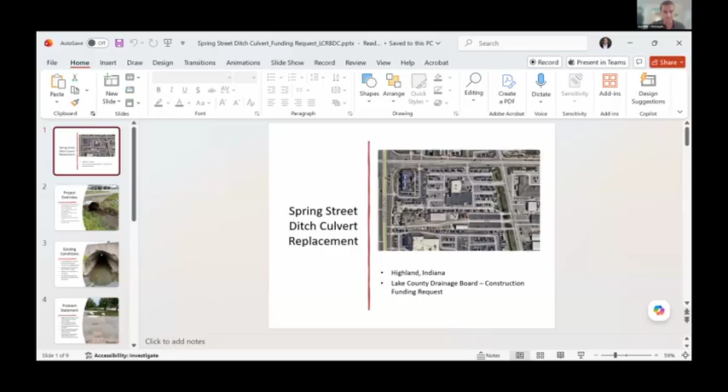I'll get going. So first off, thank you to the commission for having me tonight to present. My name is Joe Wilk. I work at Christopher Burke Engineering, and I'm here on behalf of the Lake County Surveyor's Office and Lake County Drainage Board for construction funding requests for the Spring Street Ditch culvert replacement.

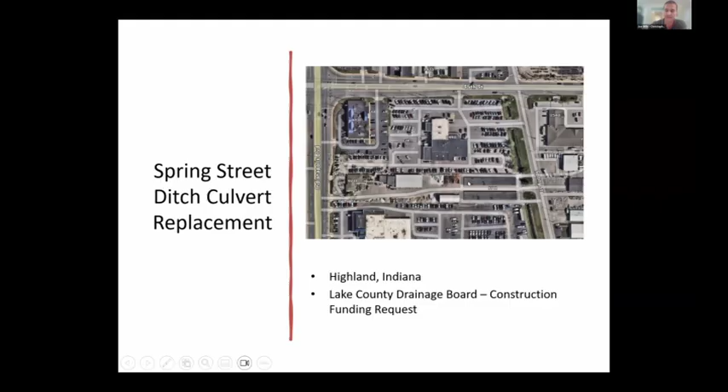You can see on my map here that this is located just southeast of Indianapolis Boulevard, near 45th Street. Spring Street Ditch runs south to north through here in Highland. So project overview: replacement of a failing culvert on the Spring Street Ditch. Local sponsor, as I said, is the Lake County Drainage Board. It's within the Cady Marsh Ditch watershed, and Spring Street Ditch feeds into that.

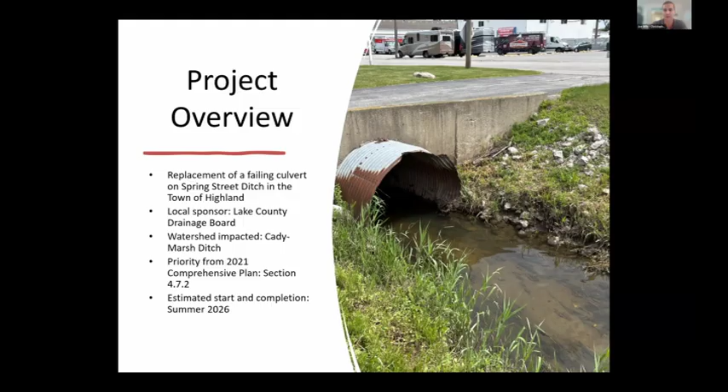From the 2021 comprehensive plan for the commission, failing culverts along Spring Street Ditch were noted to be a priority, and this is one of them. Estimated start and completion for construction, we're hoping to do sometime later this summer. This is a photo of the culvert on the upstream end along Spring Street.

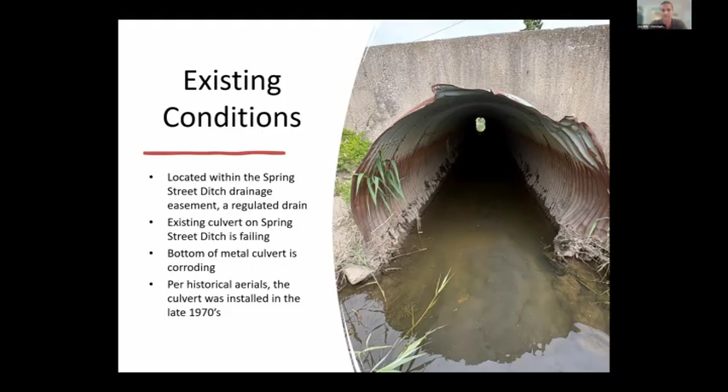Some more existing conditions: it's a regulated drain right from the Lake County Surveyor's Office. As you can see in this photo, this is me standing in the middle of the channel. The bottom is corroding out, we have some flow lines getting up about halfway, and it's seen better days. I was looking at aerials the other day, and it looks to have been installed likely in the late 1970s, so we're approaching 50 years, which is about the typical lifespan of a culvert.

So some of the problems: it's failing, restricting flow and conveyance during storm events. Any type of failure in a culvert could increase flood risks to surrounding businesses and local roadways in this area. And as we all know, each year there seems to be greater runoff from urban areas and rising rainfall rates, so we want to make sure we get this culvert properly restored in the near future.

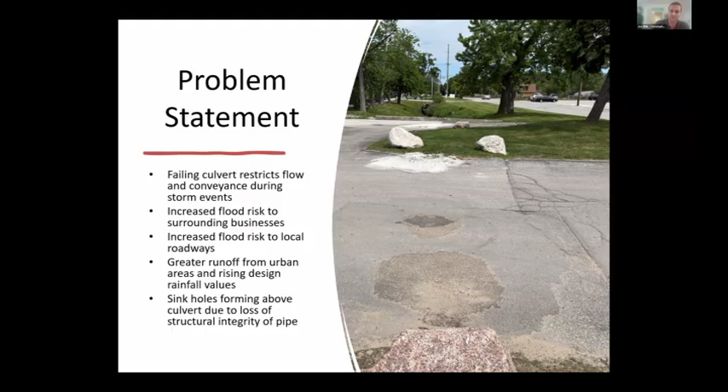This is a photo from the top. There are 3 driveways that go overhead, and sinkholes are forming due to the loss of structural integrity of the pipe. I actually walked through this pipe, and there are some parts where it's starting to collapse in.

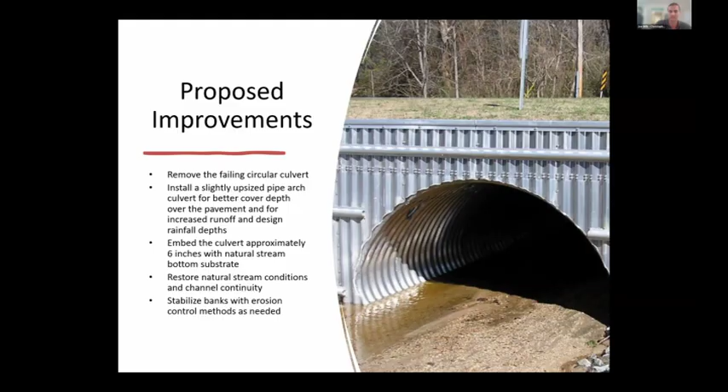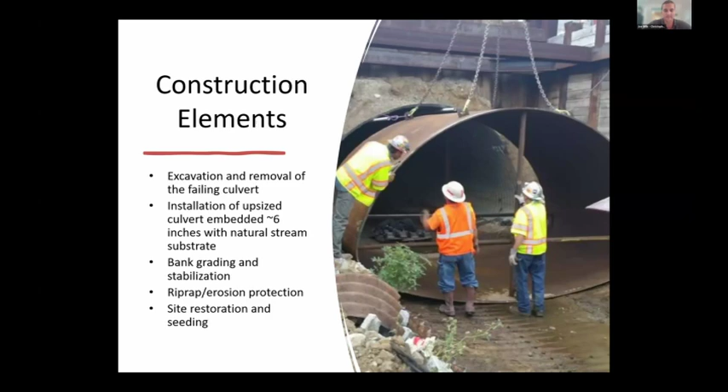So some elements, basically just removing that culvert, that 6-inch substrate, and then some site restoration for those driveways and the grassed areas on top for this property.

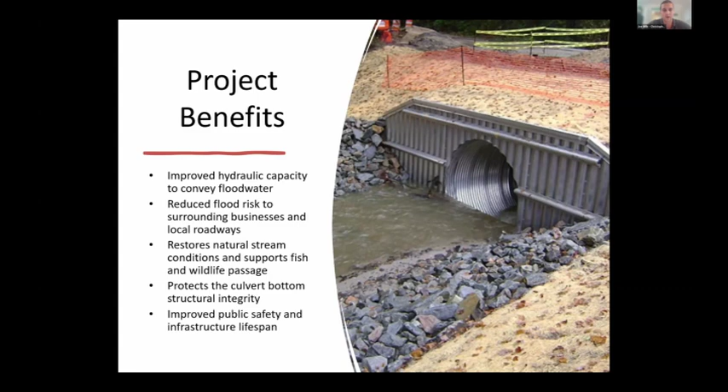Project benefits: we're getting slightly upsized culverts, which would be great for hydraulic capacity, convey floodwaters on a day such like today, and reduce that flood risk to surrounding areas. And that 6-inch natural bottom helps with fish and wildlife passage, but also protects the culvert bottom from corrosion like we've seen in a lot of other culverts in the one at hand. So hoping to get pretty good lifespan on this new culvert.

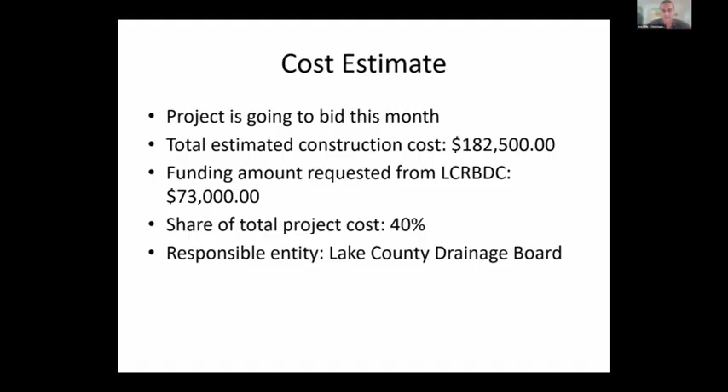Now the project has been approved to go to bid, seek bids. So we don't have the low bid yet, but the total estimated construction cost is roughly $182,500. Funding amount requested from LCRBDC is $73,000. Share of total project cost is 40%. So thank you, and I'll take questions.

I've got a few. Is this out to bid yet? No. But it's fully designed? Correct. Is there a reason you guys didn't go with the concrete box culvert? The price on that goes up quite exponentially. Okay. And we've seen a lot of these lower trafficked driveways such as this. These contacts the company that does a lot of these corrugated metal pipes. We've had quite success in the past on more lower trafficked roadways and driveways, because it's just a driveway.

Correct. And you had mentioned, is this a regulated drain? Correct, regulated drain for the Drainage Board, Lake County. And how much bigger is the capacity? You're increasing the size of the drain, so percentage wise? I'm not good at simple math here, but we're going from a 28 square foot opening to a 30 square foot opening. So nothing drastic, but definitely a benefit.

And there's restrictions upstream and downstream of here, so until all successive culverts each way were to be upsized. And when do you anticipate going out for bid? In the next week or two. Okay, that's all the questions I have.

Thank you. Next up, Town of Winfield, 117th Avenue Drainage Improvement, Mr. Repay. You want to come up here from DLD representing the town of Winfield?

As explained to me, they have several flooding issues here normally on this road, and they want to put together a more comprehensive plan. That'd be somewhat accurate. Yes, all right, quite accurate. I listened then. Okay, are we?

Yeah, if you want to share. Can you share? Sure. Here's what's gonna happen if I have to start, get on the Zoom. If I have to be the technical support, we're really in trouble. Right there. That share. So forgive me, I don't use this laptop, I have a desktop, so I figured. I'm being trained as I go on this one. But let me get this up to full screen.

All right, so as I said, this is 117th Avenue, and to go on down, this is where it's located. It's along the old railroad bed and on 117th Avenue in Winfield. And for quite a while, it's been some issues with drainage.

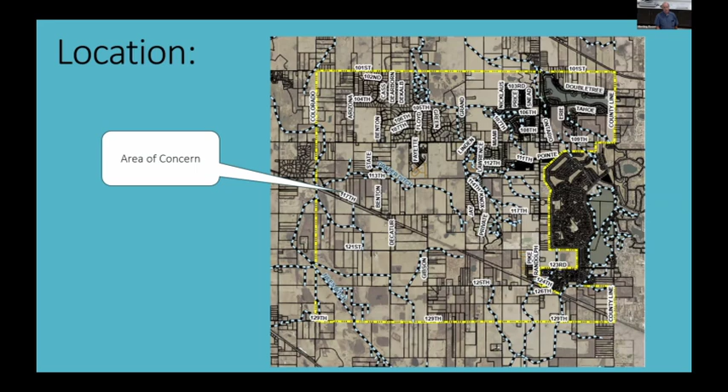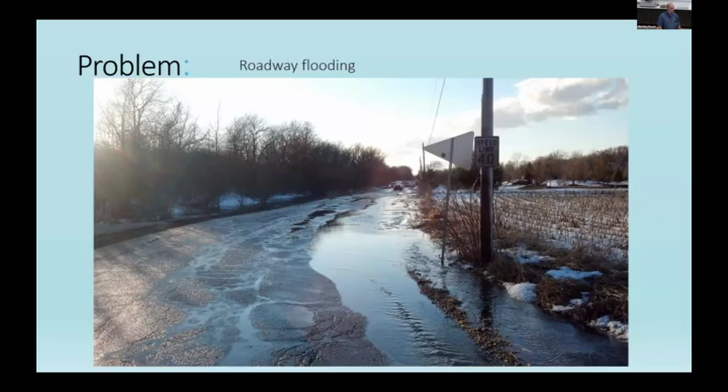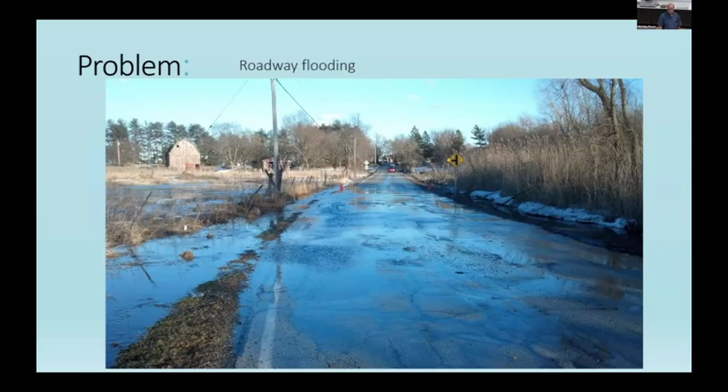You can see here, as the roadway gets overwhelmed with water, and as well, of course, this was wintertime too, but you see there's very little ditches or anything on the side, and it's aging the pavement faster, and it's also being a hazard for driving. Continue on, this is the low section, and I'll get to where it's located on the thing, but you can see it's just overwhelming it.

We're going to look at this picture again, but keep it in mind - you see the railroad on the left-hand side of the picture, and you see where the ditch is.

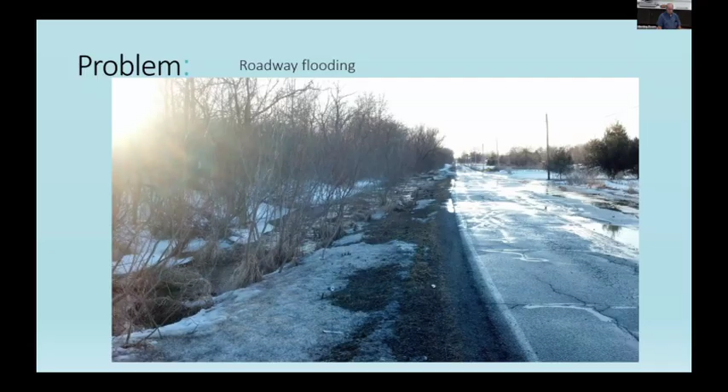The town did an investigation on the watershed, and it's served by a single culvert under the railroad. Of course, railroad culverts are notoriously small - I don't think they're meant to do much conveyance.

The elevation on the roadway side, the north side, is about 683 feet. The distance to that low point, which I'll show on a map shortly, is about 1,500 feet.

Originally the town looked at the simple way to take care of this - just do a roadside ditch. It didn't work out so good, because if you put a slope in at 1%, we'd need 15 feet of elevation change. Going down to the other side of that low point, it's only 691 feet. Doing the math, we don't get our 15 feet - we get about 9, from 683 to 691.

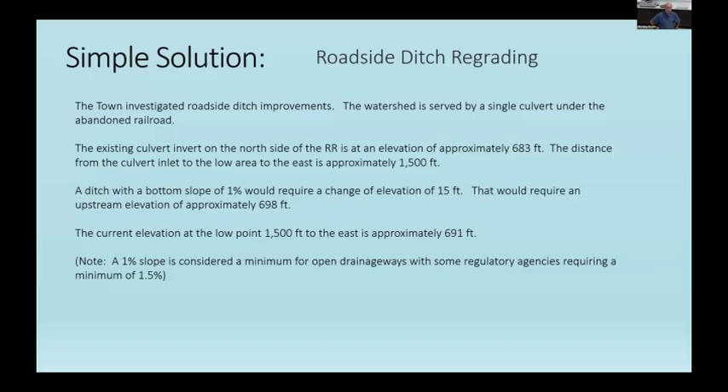So we continued looking at this. Here's the location - the low point is about 1,500 feet down, and you see the culvert outfall on the side at 674. That could be good news, or at least we were hoping. But as all stories go, this one didn't end up so nicely.

We realized you can't do a ditch at that elevation on the inlet side of that culvert, so we began to look at the south side. But then you go back to the same thing - if you go down there, we can't get that elevation all the way down to 1,500 feet.

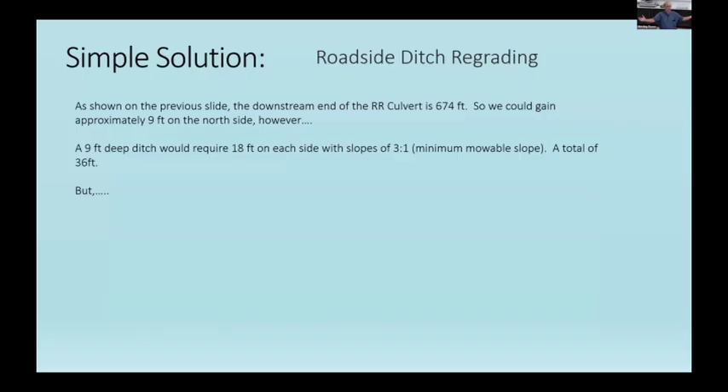But now the ditch is about 9 feet deep next to the road, and going through it with 3-to-1 slopes, we would have needed about 36 feet of open space to put a ditch in at some points.

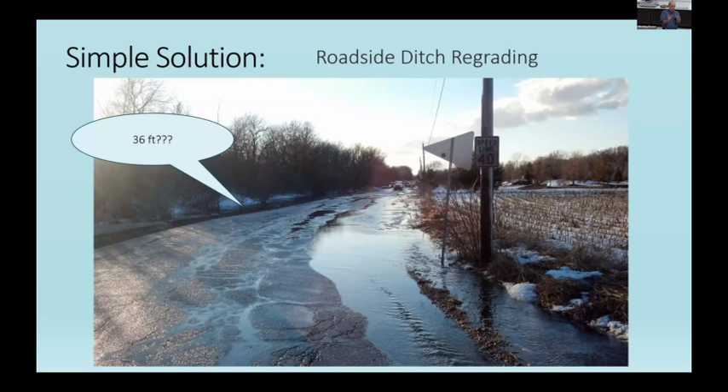So we go through, and that's the picture you saw earlier - there really isn't a lot of space between the roadway and that railroad bed. And as all stories go, there's an 8-inch gas line we found between the road and the railroad bed, which is huge as far as gas lines go.

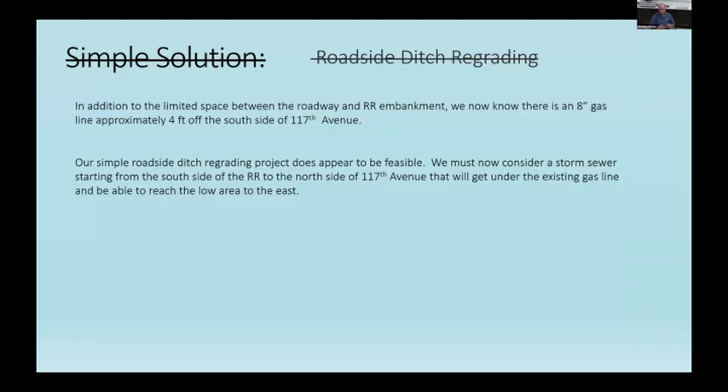Now we've got to keep cover on it - it's 4 feet deep. There's just no way we can put a ditch over there that's going to serve this area. That's what led us to the next thing, also looking at the watershed - there's almost 100 acres coming down to this.

So what we want to do is restudy this and try to get a culvert under the railroad, get it down low enough, but we're going to have to create a storm sewer to do it. That's what the request is really about.

We're going to do the storm sewer and preliminary design on that, so we know what we're dealing with. With that storm sewer, we've got to check that watershed, make sure the pipes are sized right, and then look at detention because we're going to be conveying water a whole lot quicker down there.

The only place to do that will be on the south side of the railroad bed, which is prime farm ground right now. So we need the plans and sizing of the ditch to begin approaching the landowners and say, hey, we need to do detention - what can you let us do?

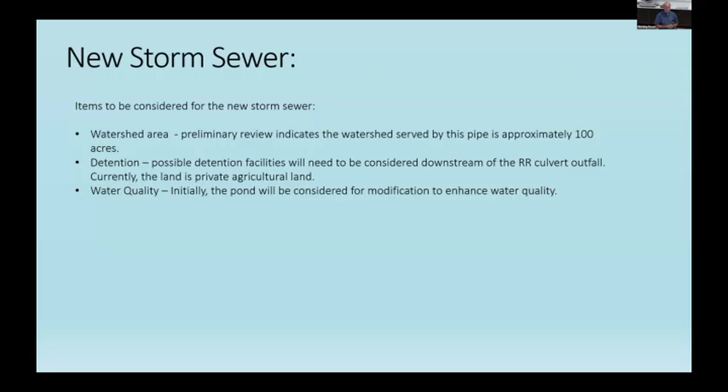And of course, we want to address a little bit of water quality by modifying that pond. So that's it in a quick nutshell of what happened and what it took to get there. We'd just like to request assistance for the study and preliminary plans.

We anticipated a cost of $58,500 and are asking for 80% of that, $46,800, from the commission. Did I cover enough? Any questions? This is strictly for engineering and design.

Is there an ancillary thing that we're doing? Is there development going on? Is that why you're asking for this, or future development?

On 117th, Crown Point just put a school down the road, and this 117th is getting to be a very busy road all year round. So you saw the flooding - that's going to be an issue with the buses and everyone else going, as well as the rest of the town. It's becoming more of an artery for the town than it used to be. So we're trying to get it addressed, and that's really all we're going to stop with at the roadway.

But we do have to go to the north side of the road with the storm sewer because of that gas line. And a question, go ahead Tom, Robert.

Is this a tributary to what ditch it flows into? Is that Beaver Dam ditch? I would think so. It's that or Niles ditch, one of the two. Not too many others that go that way. We did a study, I think Dan, 3 or 4 years ago on Beaver Dam, and there's capacity for that ditch with all the development further west.

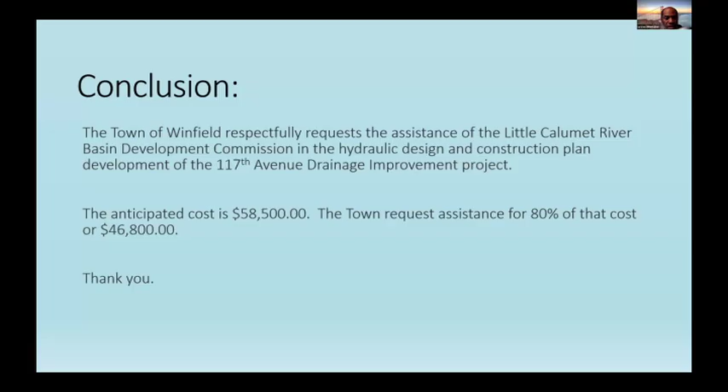Is the one existing drain regulated, the one we're going to outfall to? No, not. Again, this one drains down into another drain that is a trib, but it's still not a regulated drain. The next drain is a regulated drain through there.

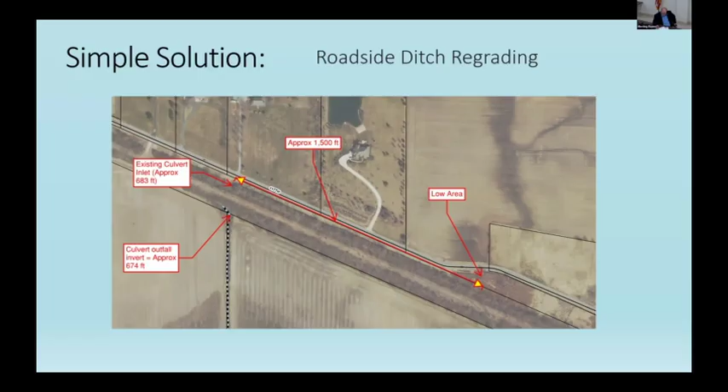So the third item on the list was going to be the Maryville Stormwater Utility, but they're going to delay that till next month, a future date. They are dealing with a lot of stuff going on right now, which we can understand.

After that, we've got the City of Hobart, Lake County, Wisconsin Street Bridge Causeway. Yeah, good Dan, you hit it. It's part of our Deep River study.

Glenn's here. I don't know if Dwayne, are you on this one or not? Yeah, Dwayne's on this one, Dwayne Elvison from Lake County Highway. Are you gonna present from there? I will call it there. All right, so they're gonna present on the bridge, and I think there's been some small changes to their design, and they'll explain that to you as to the hydrology of Lake George and Hobart.

Do I need to be your IT support too? I think I'm... Jodi's laughing at it.

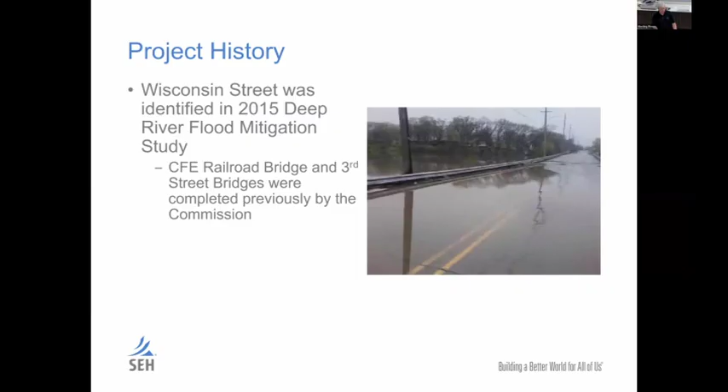This is Wisconsin Street back in the 2008 flood, which was the overtopping event here. As part of that study, we had an existing 110-foot span of Wisconsin Street. There's been structural deficiencies on this project, I think, since we started it in about 2018 on the design side of things. Currently it's load rated for 12 tons to go across here.

We're at the point now where we can't wait any longer on this bridge, and we need to start moving forward on this in order to have this safe bridge through here.

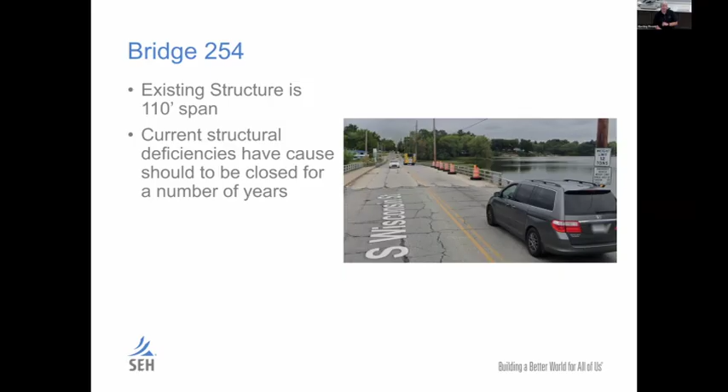So proposed on this project, we do have a 140-foot span that was proposed on this project. This does have a low member elevation that exceeds the 100-year elevation out there. What this does, and I do have a table in just a second here, is a summary of all the kind of design flow elevations through here.

Where we're at on this project is out to bid. We have extended our bid deadline on this project because as we got into the Hobart Dam analysis that you guys saw last month, there were some changes here.

We had proposed to raise the road, the causeway, up about 3.5 feet from the low point. As we continued the Hobart Dam analysis, and got some initial feedback from contractors, it was an extremely costly effort, extremely difficult and extremely long time frame. So we pulled back the initial bid date so we could issue an addendum to just reconstruct the roadway at its existing elevation, or resurface it at its existing elevation, and build the dam, and reconstruct the bridge with the expanded opening there.

So the Hobart Dam project, just to give you a quick summary here. The top line here is the corrected effective elevation, this is the 2014 model data that was done originally. At Wisconsin Street, the BFE was 612.60. With the railroad bridge at 3rd Street and Wisconsin, we're lowering that base flood elevation down to 609.49. We've talked through this with the dam as well.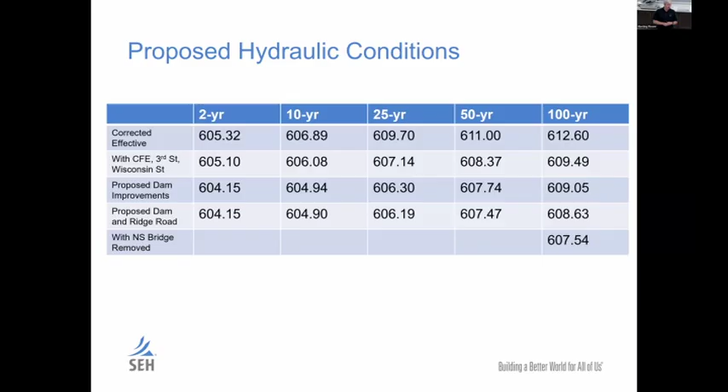Our original cost estimate on this project was 6.3 million. We've since revised the scope of work to remove that roadway elevation, and we're coming in right about 5 million. So the city and county are requesting 50% of the construction funds. I talked about that revised scope, but we are anticipating opening bids in mid-July for this project. That'll open up any questions you guys may have.

Unless Dwayne and Alex, anything on your guys' end would you like to add?

As far as the bridge goes, right now at Wisconsin Street Bridge over Lake George, that's the county's number one priority as far as bridge replacement. That's the worst bridge we have. It is in serious condition - it's posted for 12 tons. So it is in serious need of attention. Right now we've got that on a 12-month inspection frequency, so that bridge gets a lot of attention, a lot of inspection. We keep a close eye on it. So it does need to be addressed.

Just for some historical purposes, I was standing on that bridge in 2008 when that flood came through. So this has been a long process, but it's going to relieve a lot of flooding for a big segment of northeast Lake County. It's a very needed project. I'll also add that since 2008, with all the improvements to the bridges throughout town, we haven't seen that flooding on Wisconsin Street. So the improvements that have been occurring have been helping significantly. We thank everybody that's been in support of those projects.

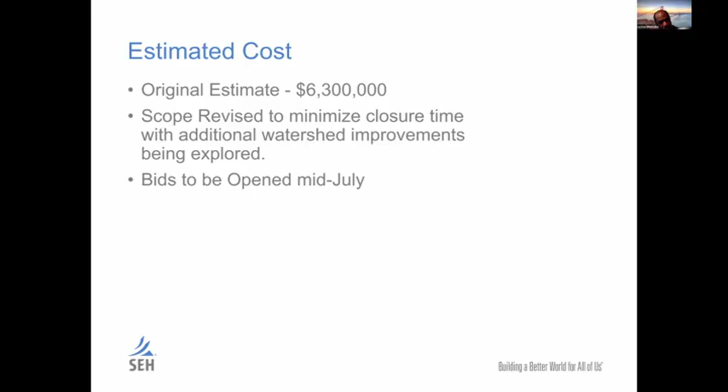So the 20 feet that you show, the 20 foot approach shown back on the drawing you had up - so that does not include anything? Where is that 20 feet? Okay, there it is, 20.5 on 20.5. Okay, so the opening here is going from 110 feet to 140 feet for the opening on Wisconsin Street, and it does not include the approach on either side. Correct.

But the 6.3 million includes all that.

Mr. Chair, yes, Mr. Ware. You mentioned - is it currently overtopped during high water events now? So the elevation, yes, the low point does overtop. The bridge itself does not overtop at the moment.

The roadway approaches overtop. They have not overtopped since the railroad bridge was replaced. So that was kind of the major discussion - we wanted to see all of the improvements and look at this more holistically before we build up the road just to build up the road. The comment also was that this is the number one county priority of all the bridges that the county oversees. Yes, it's rated number one as far as priority for replacement right now, out of the 186 bridges in inventory and maintained.

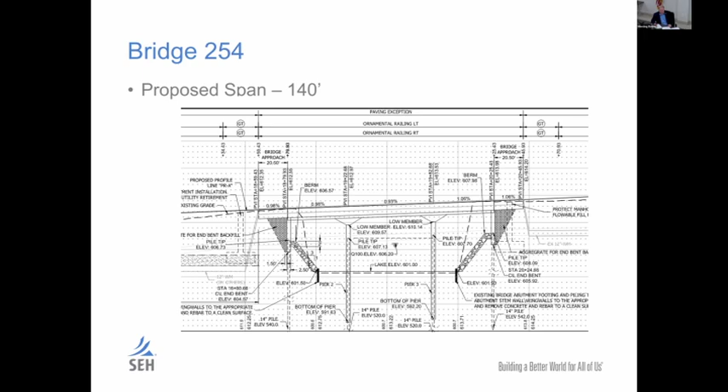So basically it's open next spring. Right, it's pretty exciting. Anyone else? Like I said previously, if we have additional questions, Dan may be forwarding them to you. Thank you very much.

Moving to the next order of business, other issues and new business. Mr. Chairman, I'd like to make a motion to approve resolution 2026-11, an interlocal agreement with Lake County for the shared cost of construction services for the replacement of Lake County Bridge number 45-00143, Kennedy Avenue over the Little Calumet River. We have a motion, we have a second.

Mr. Repay: So in previous meetings, I told you we had an agreement in principle. This just makes it more concrete in an agreement. They're gonna give us $450,000, thanks to Dwayne who wrote the interlocal agreement, a year, for 10 years. So they're helping us out a lot on Kennedy, and we thank the commissioners and Dwayne for helping out in the cause.

To sort of memorialize that, was it on the commissioner's agenda today or no? That's all right, we'll have to get someone I know to get it on the agenda, I guess, right? I know what the family discussion will be this weekend.

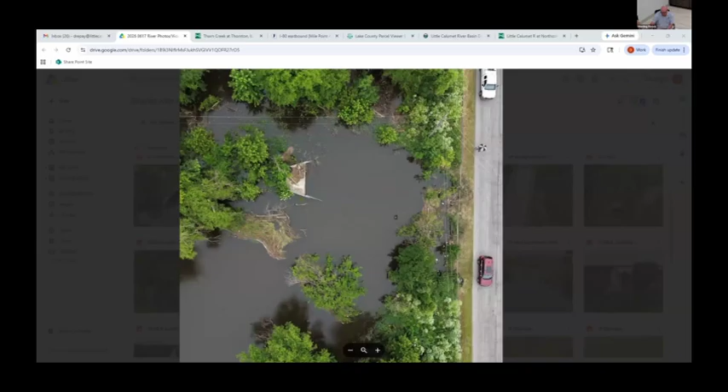If you can, let's see if I can zoom in and it'll catch up. But you see these two half circles are the actual culverts that are collapsing and encroaching on the actual road here. If these collapse or fully collapse, there is no way for the water to make it east to Burns Waterway.

So, pretty important - we sent this over to the city for their comments. They have had none yet, so we would just ask to go out to bid for this project.

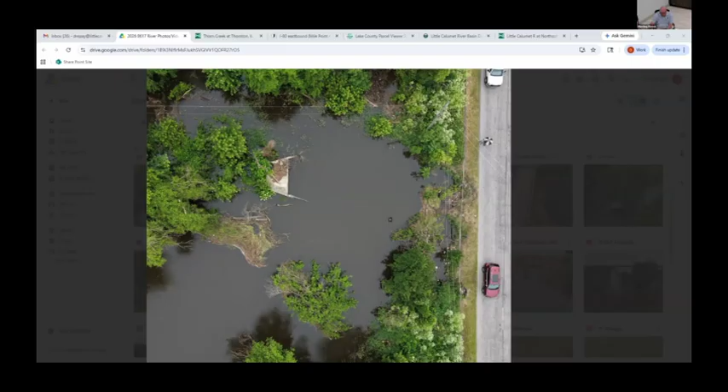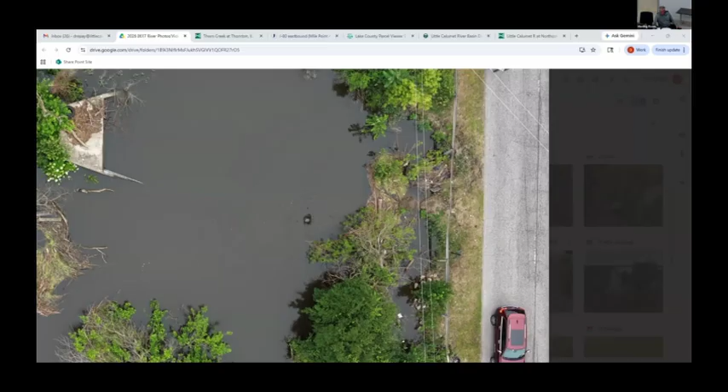This authorization to advertise bids for the Martin Luther King Drive culvert replacement. Lambert, Yes. Tom Shinsky, Yes. Dave Castellanos, Yes. Ron Ware, Yes. Jenny Orford, Yes. Robert Ochi, Yes. Katie Fesco, Yes. Levon Whitaker, Yes.

Next item up is 10C. Motion to approve an agreement with Delta 3 for Kaiser Ditch clearing from US Route 30 to 73rd Ave in Merrillville at the daily rate of $7,000. I have a motion. Do I have a second? Second. I have a second.

Mr. Repay: Once again, I've got on the screen the aerial from Lake County GIS system. This blue line is Kaiser Ditch, from US 30 all the way to 73rd. You see, it's very tight quarters between these houses. It's a priority for the town of Merrillville, which I was hoping they would be here as well.

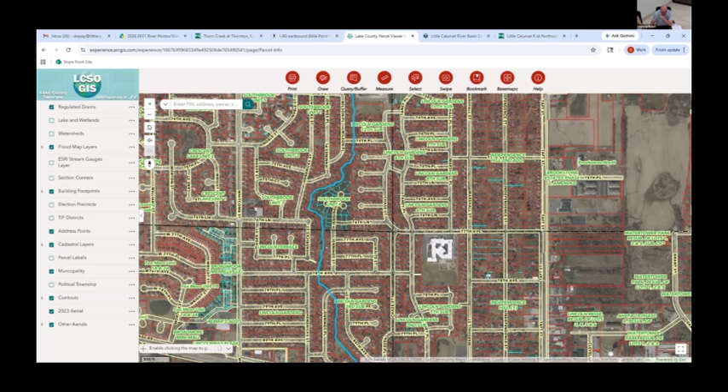It's also a priority for the Lake County Drainage Board. Their goal is to design the bank stabilization work after we clear it. Right now there's a lot of material, brush, trees in this area that need to be cleared before they can work on stabilization. Stabilization will be a lot like what we do in Hart Ditch with riprap and reinforcement. It's not as steep, but it is close quarters to a lot of the folks that live there. You see where it extends - it goes past US 30 to a point just by 97th and Whitcomb. So this is the entire drainage area that it's responsible for.

Is that a regulated drain? It is a regulated drain. I would imagine in the fall, probably in the wintertime, we'll get a proposal from Lake County for the construction of it once it's designed.

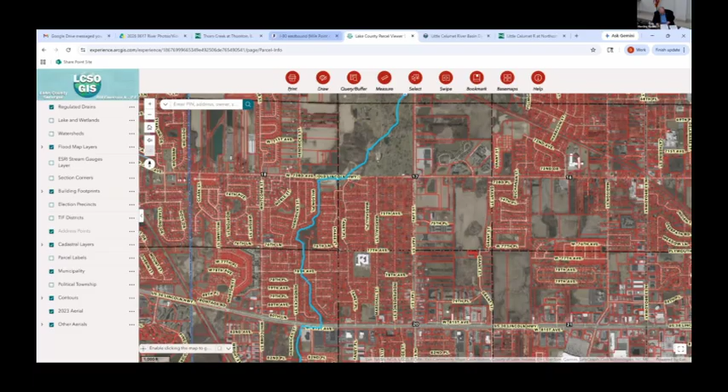Any other questions? Got a motion and a second? Lambert? Tom Shinsky, Yes. Dave Castellanos, Yes. Ron Ware, Yes. Jenny Orford, Yes. Robert Ochi, Yes. Katie Fesco, Yes. Levon Whitaker, Yes.

The last order of business is item number 10D. Mr. Chairman, I would like to make a motion to approve resolution 2026-12, declaring an emergency for phase 5 of the Hart Ditch Stream Bank Stabilization Project.

Hart Ditch Stabilization phase 5 is a project that has gotten worse after this rain event. Trees have fallen in the backyard. We've got emails and text messages and everything else from neighbors and residents in that area about the wind and the high elevations. I think you'll see in the document, normally it's 150 gallons per second through an area just south or just north of here - during the height of this last storm it was 15,000 gallons.

So the water has been moving, it's been deteriorating, and I think the need to expedite is probably warranted. After this all settles down, I'm sure we'll see more damage than what we could visually see right now when we've been in their backyards.